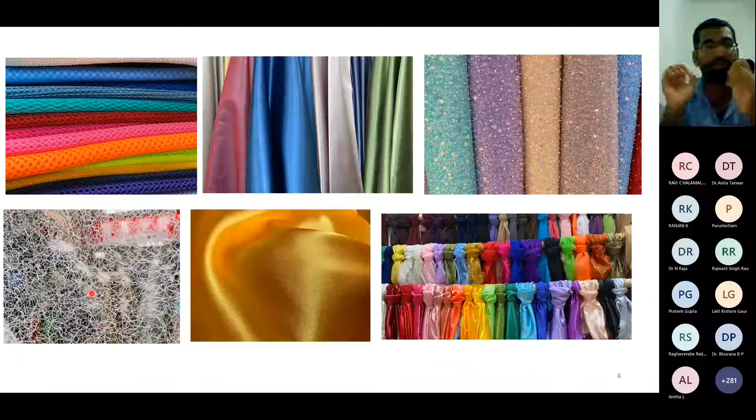And in recent years, we also faced many pandemic situations. So we also focus on something like non-woven structures like this. Here you can see these are all called non-woven structures. It's not a woven structure. It is irregular, non-woven, so that it can filter small particles. So that is a different field. They work on something that will be helpful for your mask application, something like this.

So now I want to focus on Internet of Things, right? So first of all, what is the basic component to integrate into your device? If you want to fabricate a device, that device should be able to sense your body motions, or it should sense what you are interested in. For example, if you want to sense your body temperature, or if you want to monitor your environmental toxicity, like metal ions or any other toxicants or biomolecules.

For example, if you want to monitor your glucose level, how will you monitor it? So these are all the factors we are looking at. So for the sensing, you should have some analyte like this. If you have your target analyte, your analyte should be very specific to your device. If you want to measure the glucose level, it should only measure the glucose level. Other factors like your temperature or humidity should not interfere; if they interfere, then it's of no use.

So you should create some selective sensors so that they work well. Or the sensors can be multifunctional, but they should not interfere with each other. So that is more important. And in the current situation, we are working on many Internet of Things, right? So why do we want Internet of Things? All the presenters before introduced everything in detail, so I don't want to go into more detail. I can just show the important things happening with the Internet of Things.

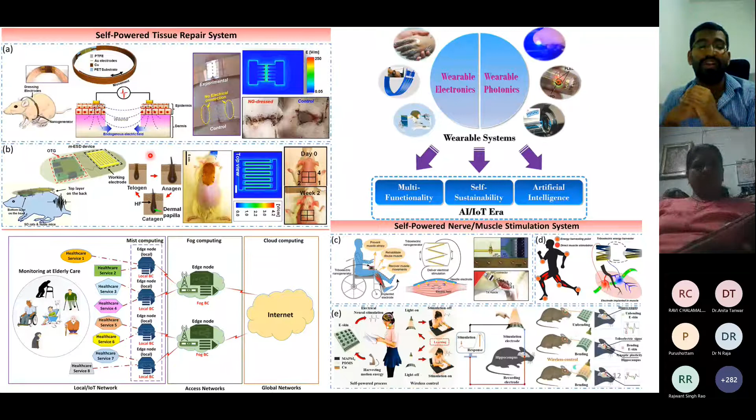And if you have some elder people in your home, you want to monitor them. If you want to monitor the health from remote locations, then you can easily monitor using IoTs. So another factor is you can also create some self-powered nerve stimulation system. Here you can see they are using some kind of self-powered, because in this case you don't want to provide the energy, because that is one of the drawback.

If you are running out of energy, then you cannot monitor yourself. So if you have this kind of self-powered system, you don't want to rely on any power source like capacitor or battery system. So this is more important. So this is quite interesting. So we are also doing this kind of self-powered devices.

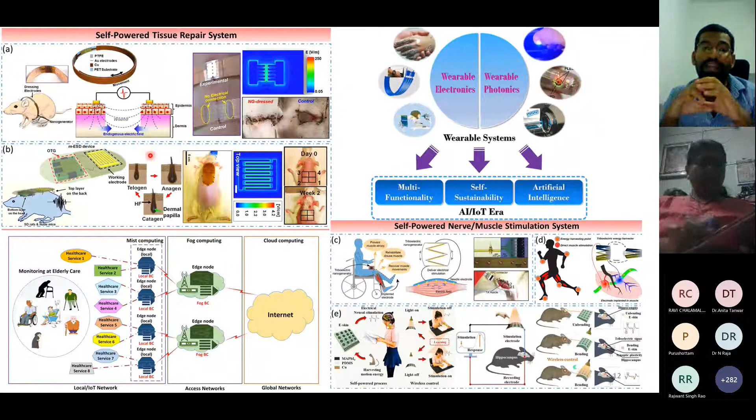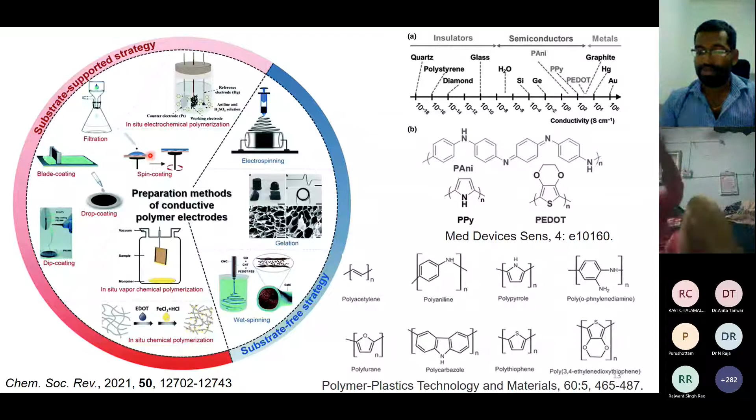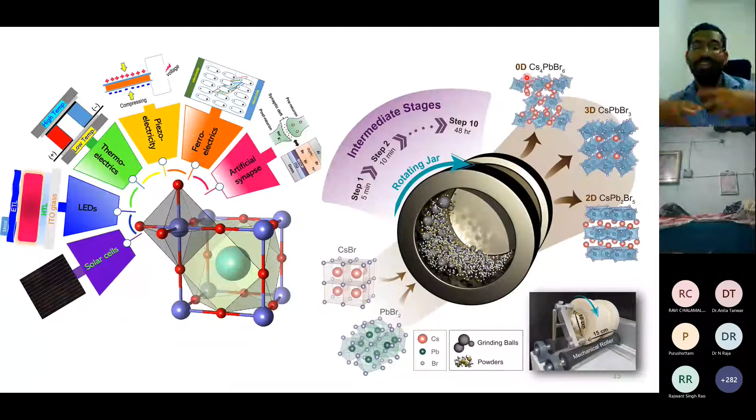So depending on the structure, work function, this kind of details, if you tune, then you can apply it in specific applications for solar cell, LEDs, thermoelectric, piezoelectric, artificial synapse. There are many different applications. So perovskites are quite interesting material. It has different properties.

Okay. Yeah, I'm able to.

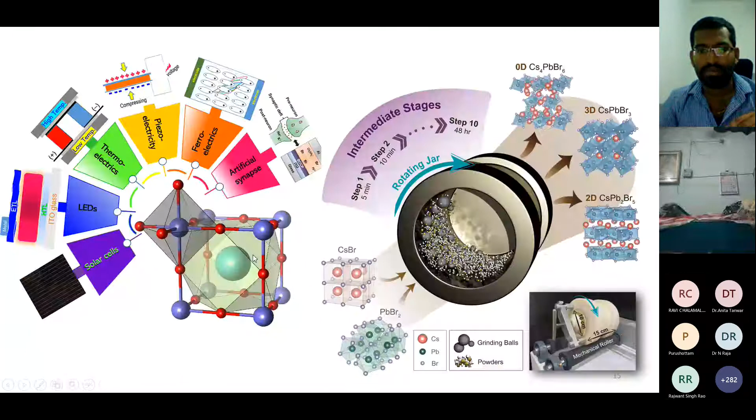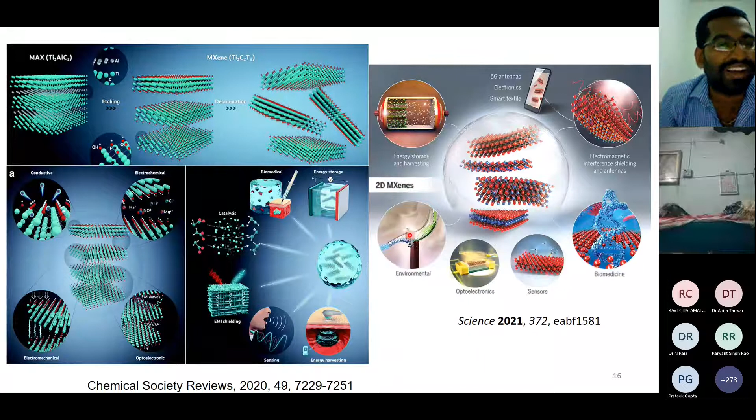I'd like to change my slide, but it's not moving. Sorry.

Okay. Now I want to stress why we want wearable sensors and self-powered sensors, because in the past we always relied on energy sources that are non-renewable. So we need renewable energy, especially wearable self-powered devices, which reduce your energy consumption in day-to-day life. That can contribute to good outcomes.

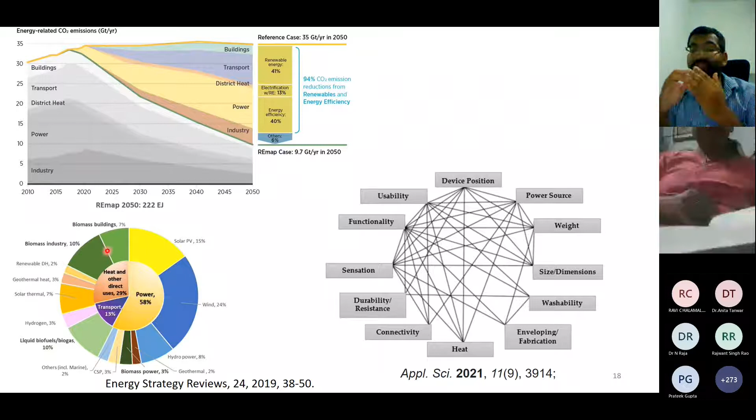And why we want wearable self-powered devices, and what factors are very important for your wearable sensors? For example, it should be lightweight, size should be smaller, it should be washable, heat resistive, connectivity should be good, it should be durable, and sensation, functionality, multifunctionality. These are all very important for wearable sensors.

And the energy crisis is getting higher day by day. And in wearable electronics, the market trend is getting higher, because everyone wants IoT based systems, because they can easily track their records, it's very transparent, and you can keep track of all your details easily in one touch, right?

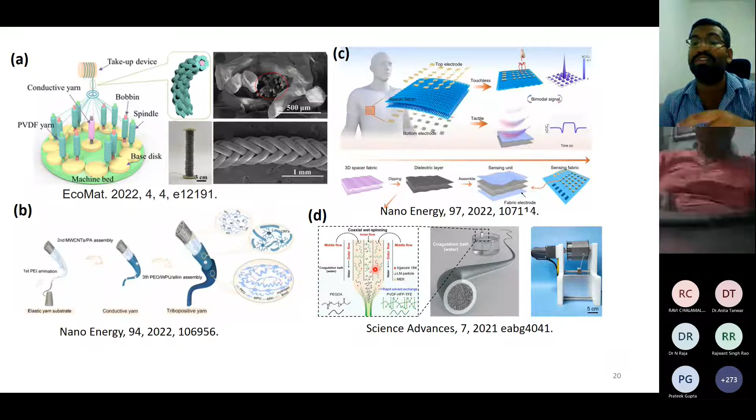And this is another method. They use elastic yarn, commercial yarn, and this is the wet spinning method, where they use polymer and functional or conductive materials inside to fabricate conductive electrodes. If you want to monitor your body strain, you have to prepare stretchable conductive electrodes like this. If you work out, your muscle is going to stretch.

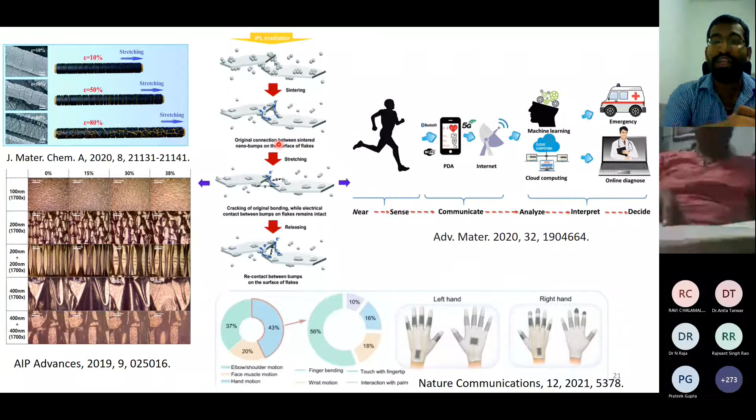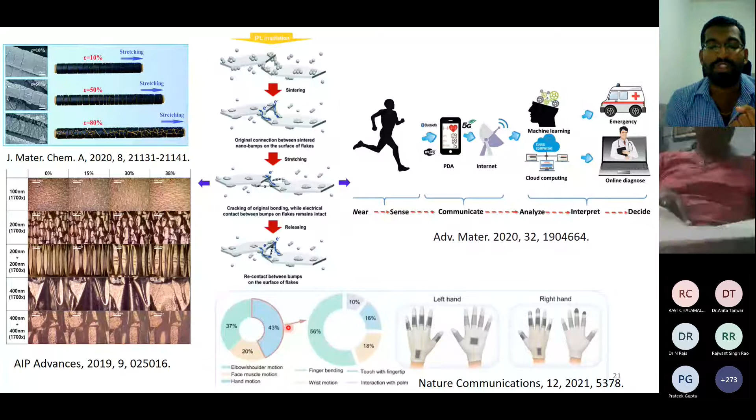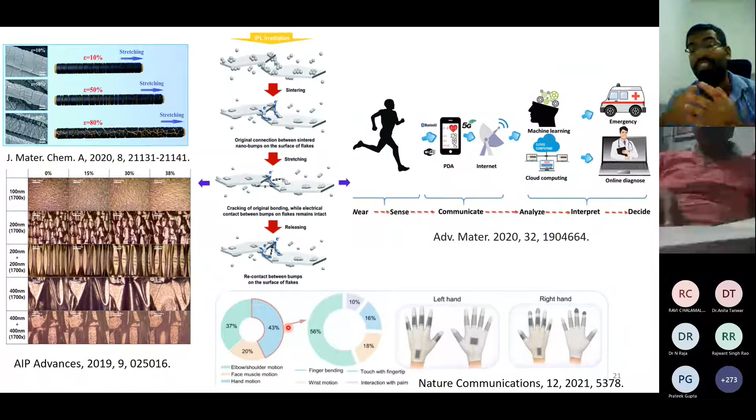So upon straining, if you work with this kind of material on your body and apply some stress, the resistance will vary depending on the different kinds of stress. In this article, they show how much percentage strain is created when using different body motions, for example elbow motions, finger motions, face muscle motions, hand motions, wrist motions, and what percentage of strain each achieves. They give some approximate values.

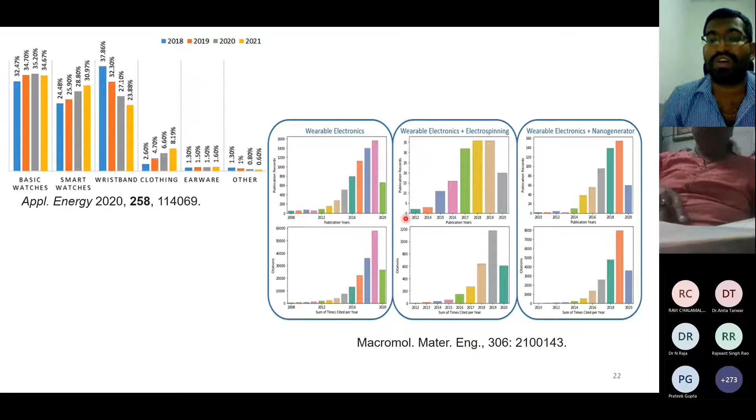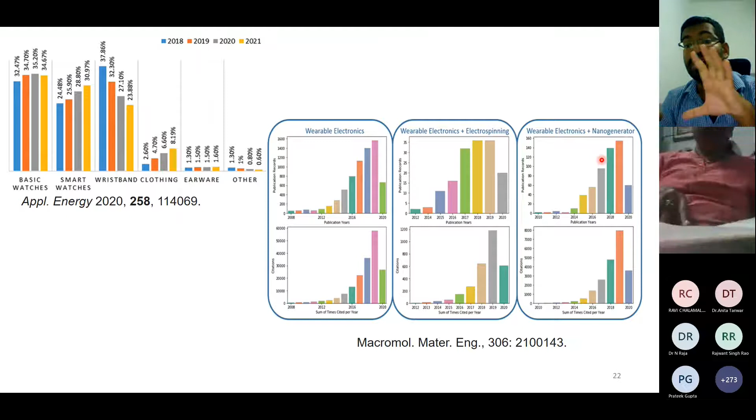The recent trend shows basic watches and smart watches, wristbands, and smart clothing growth getting very high in recent years. This highlights wearable electronics growth, with recent publications in the last few years growing a lot, and also nanogenerators to get energy with wearable electronics. So this is quite a hot topic to discuss.

We apply this kind of emissive material into light systems to prepare an optoelectronic system which is quite robust and can be reused.

Because if you're not going to heal your material - for example, if you're using your mouse and it has some problem, you cannot recycle it, the recycling rate is very low. So if you have a problem and want to repair it, or it can repair by itself, that's quite good. So self-healing is like that - it can heal by itself, so you don't lose its functionality.

For example, if your phone's screen gets torn, broken, or cracked, it can reheal by itself. So it's good, you don't need to replace them. The electronic components can be healed by themselves, which is good, and economically favorable. It's interesting, so in the future we can see a lot of self-healable materials.

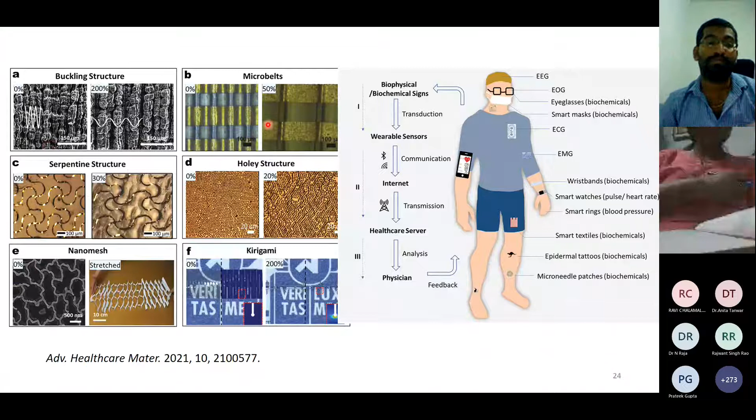Now I'm going to introduce different structures, for example buckling structure, microbelts, serpentine, holey structure, nanomesh structures, kirigami patterning. We used to play when we were kids to make stretchable components by cutting, right? That's very simple to make.

Here you can see how it works. This is a simple way to make stretchable electronics like this.

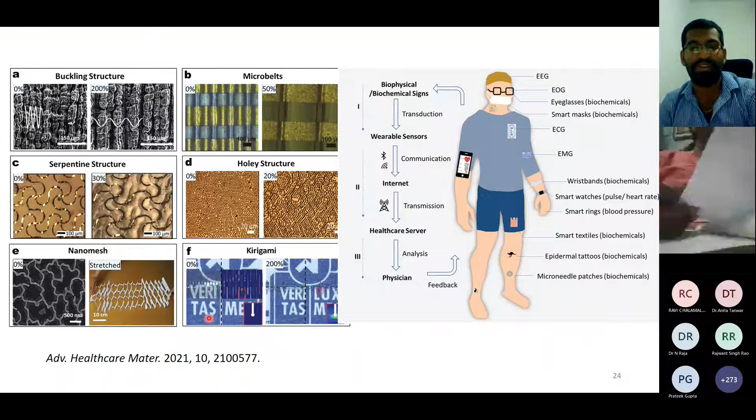Here I want to introduce this because I work on fiber-based light emitting systems as well as some sensors. I want to introduce different methodologies to prepare 1D fibrous material, starting from melt blowing, centrifugal or force spinning, blow spinning, laser assisted melt blowing, and microfluidic electrospinning.

So this is melt blowing. Here we put the polymer and melt it up to its melting temperature, then we extrude it, and then collect it as a fiber like this.

And this one is centrifugal or force spinning - it's similar to our cotton candy maker. Here we put our polymer in the middle, pass some air, and rotate it, because centrifugal means it gives some centrifugal force to your material.

Using this kind of force, we can get some nano or micro form of fibers. You can collect them, and then form some devices based on that.

The other one is blow spinning. With the help of compressed air, we can pass the polymeric solution and spray it using some voltage, and then we can form the nanofiber structure.

The other one is laser assisted melt blowing. We use the laser to heat the membrane and then the polymer, and we can form this kind of non-woven structures.

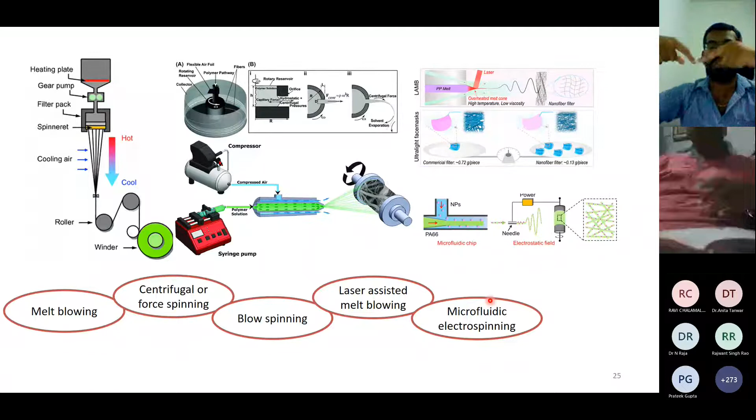The other one is microfluidic chips. We can form core shell structures, one side and the other side. Two materials can be mixed and extruded this way with the help of voltage, then the collector can collect all the fibers, so it's easy to make them this way.

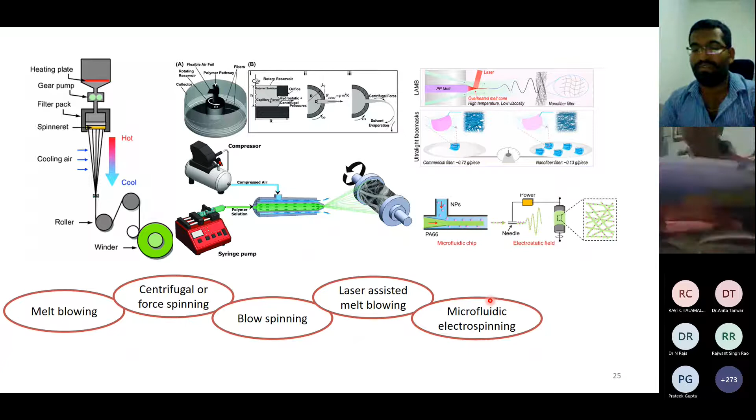I want to introduce different kinds of fibers, because what I said in the past was just uniaxial or core shell. Here there are different forms: coated structure, composite structure, neat structure, biscrolled structure.

Here you can see how they do biscrolling - it's like drop casting your film and then scrolling it, and you end up with this kind of structure. And then there are wet spinning structures.

Here you can see they use some rotating coagulation bath. If you are going to prepare fibers, you put your polymer plus some functional material like MXene, then extrude them into a water bath or coagulation bath. Then you collect them with the help of a spool, so it's very easy to fabricate.

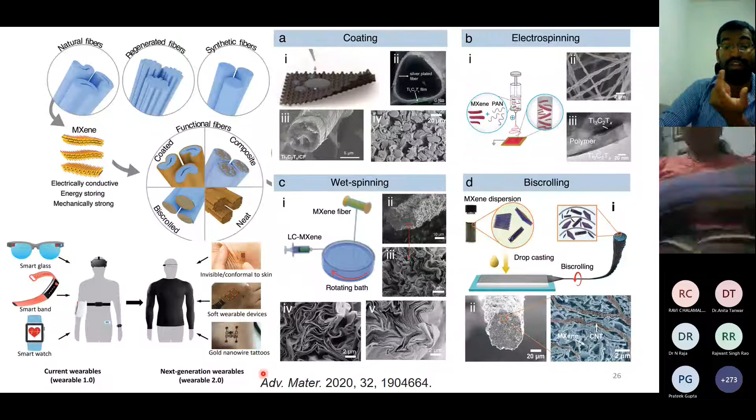There are many different wearables in the current scenario. In version 1.0 we are able to see smart glass, smart band, smart watch, and in the future you can see invisible conformal to skin devices, soft wearable devices, and tattoo based devices. So we'll expect more.

Here you can see the basic structure of how electrospinning works, since I work on fiber structures and now primarily focus on this method. This is the very basic setup - we use a pump to pump the polymeric solution, fill it in here, and using the pump and high voltage, we can collect the fibers with the help of collectors.

If you want to tune your fiber morphology, you can also tune it by using different solvents or parameters like flow rate or voltage. All these kinds of things can be done.

If you tune your needle system from uniaxial - this is like one needle - versus a double needle core shell structure, here you can visualize it. The core solution comes from here, and the sheath solution comes from here, so you end up with core shell structures.

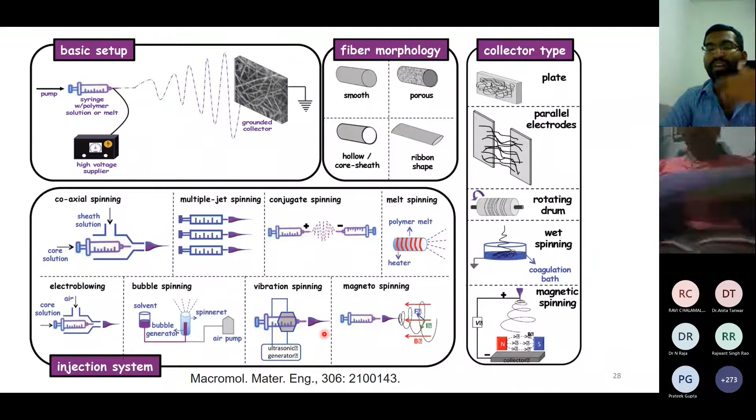There are different methods - if you tune all this, you can end up with different interesting morphologies. In this article, they mention all the different ways to collect fibers and what type of fiber system they can form using different setups, changing components to end up with different structures.

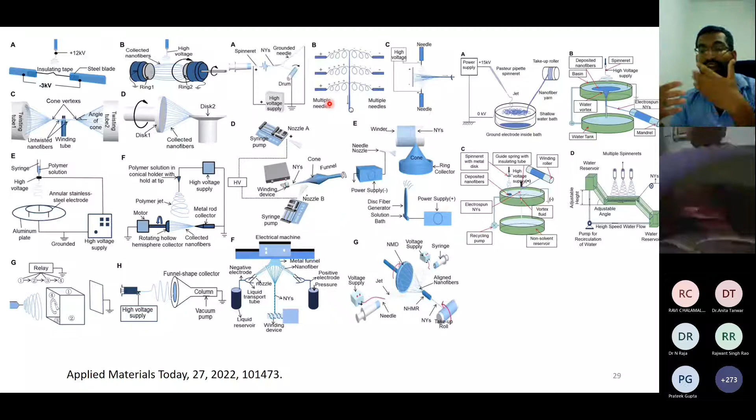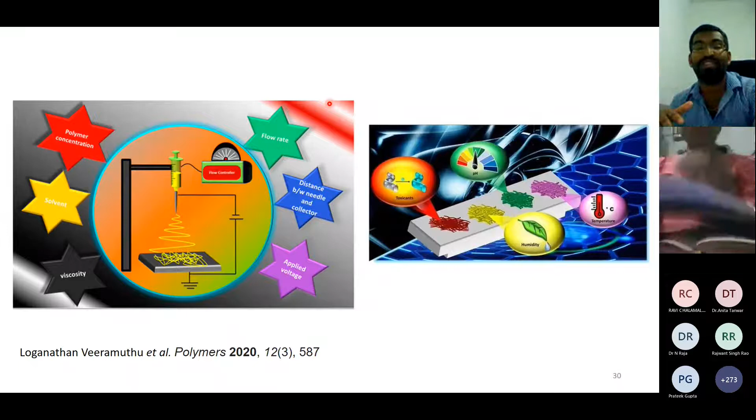This is another article we published recently, about polymeric systems - conjugated copolymer system based electrospun nanofibers - used in different fields like sensing and other parameters. This is open access, anyone can access and read it at any time, so you can have a look.

This is another paper we published, for sensing pH, temperature, and metal ions, these kinds of things. We also discuss electrospinning in this review article.

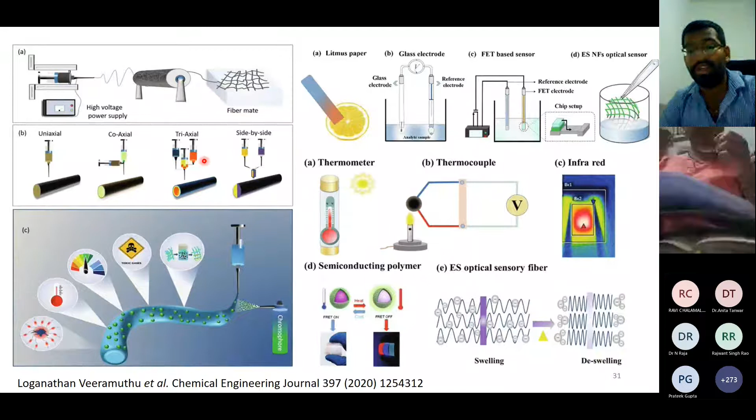Electrospinning has a lot of advantages and very good applications in different fields, starting from smart textiles, smart garments, optoelectronics, energy harvesting, batteries, food packaging, anti-fouling, biomedicals, and sensors. There are many varieties.

I want to stress there are many different sensors, not only one type. I can introduce a few types, if time permits: piezoresistive and capacitive, optical, piezoelectric, triboelectric, and magnetoelastic.

Let's go into piezoresistive, because it's very simple and anyone can understand. For example, as I already introduced, if you apply some stress on your elastic conductive material and strain it, then what will happen?

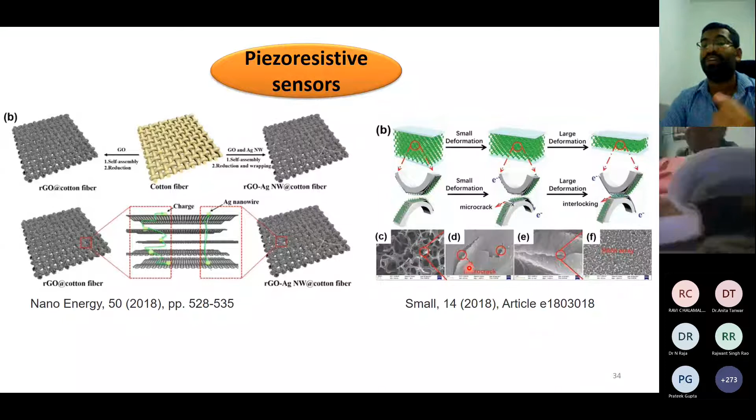So here, you can imagine this is your human skin, having many blood vessels. So if you want to monitor your pulse rate, and apply some pressure, you can see how it works.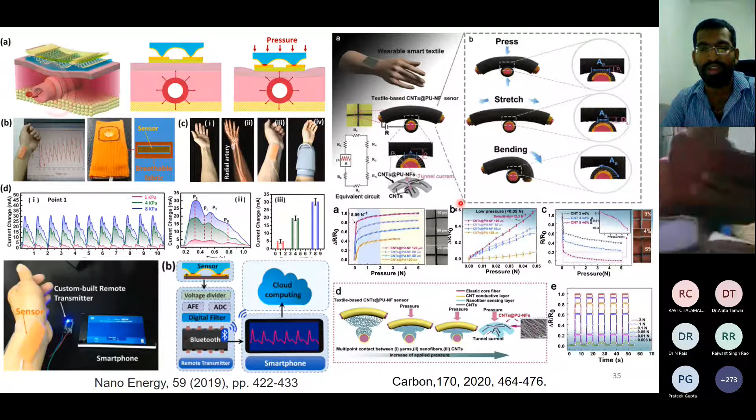The same way here, they are using wearable smart textiles, with press, stretch, and bending. They are measuring delta R over R naught, the resistance upon different newtons, 0 to 5. Here you can see how it works, the resistance value upon different newtons, ranging from 0.003 newtons to 3 newtons. It's a very easy working principle, so anyone can easily understand.

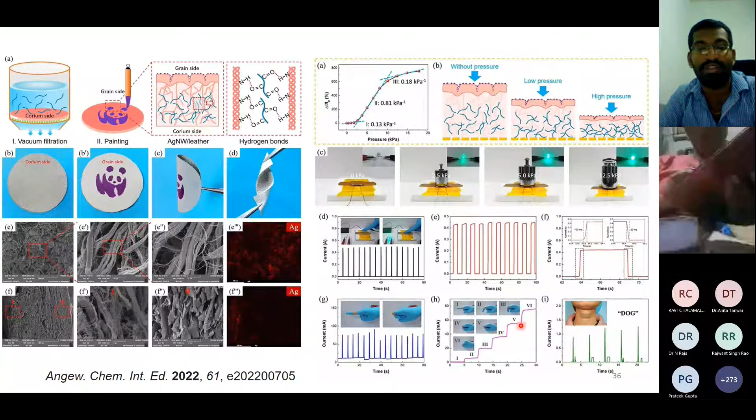The electron is going to be transferred from top to bottom. So that kind of stress or pressure can be easily monitored using this kind of structures.

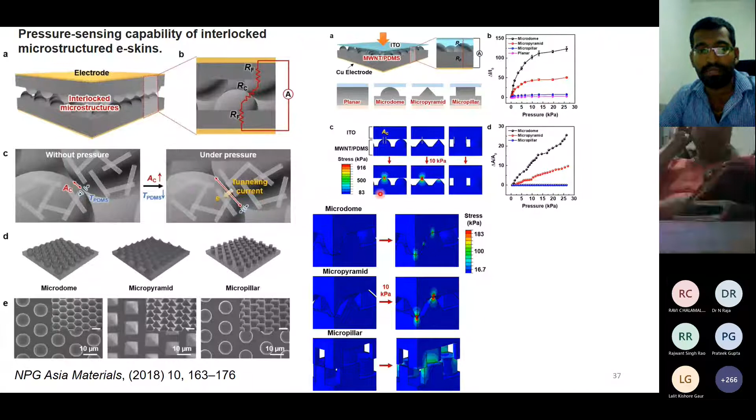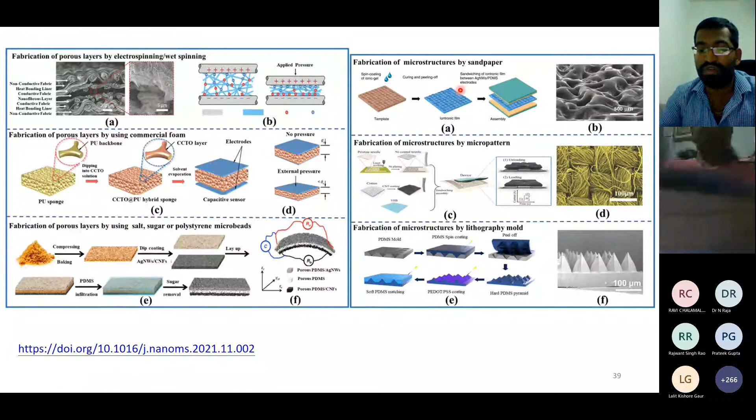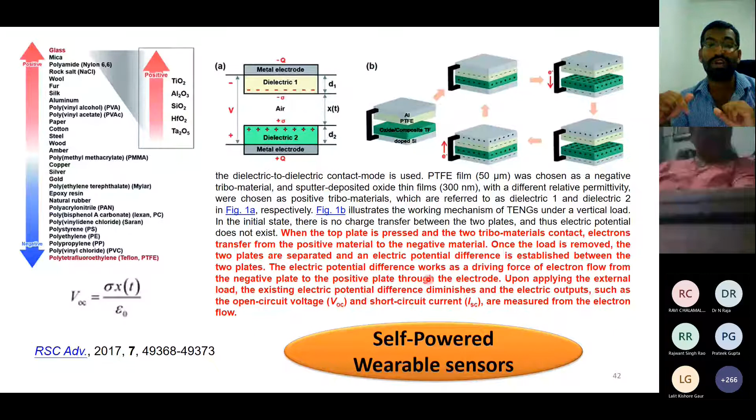This is how your self-powered wearable sensors work. So self-powered triboelectric wearable sensors work on this principle. You need two dielectric materials and electrodes to form this kind of wearable sensors, self-powered wearable sensors.

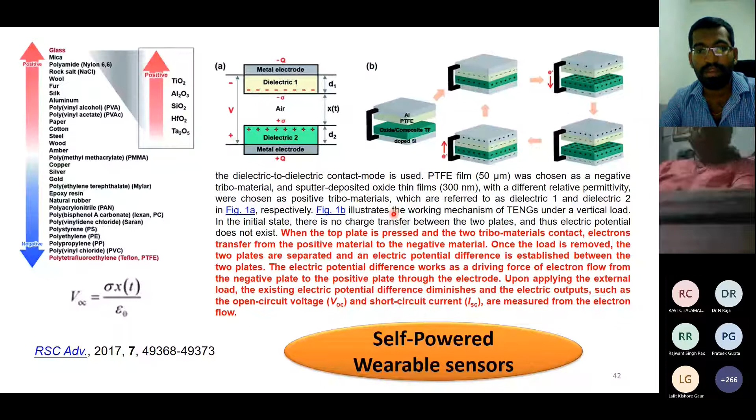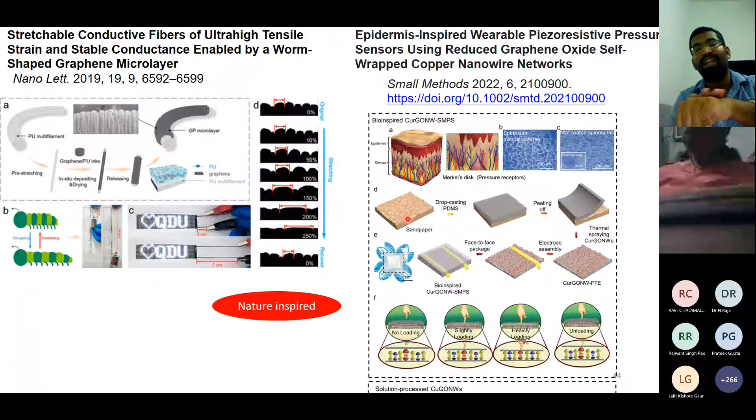And the other one is epidermis inspired. You can see, because our skin has dermis and epidermis layer.

Epidermis is the topmost layer and dermis layer is the bottom. So how can we mimic this kind of structure? By using some sandpaper and then dropping some elastomers like PDMS and then peeling, you'll end up with this kind of rough structure, and then do some electrode assembly. Upon pressure, this kind of rough structure is going to give better sensitivity. That is the idea. So they published this kind of work.

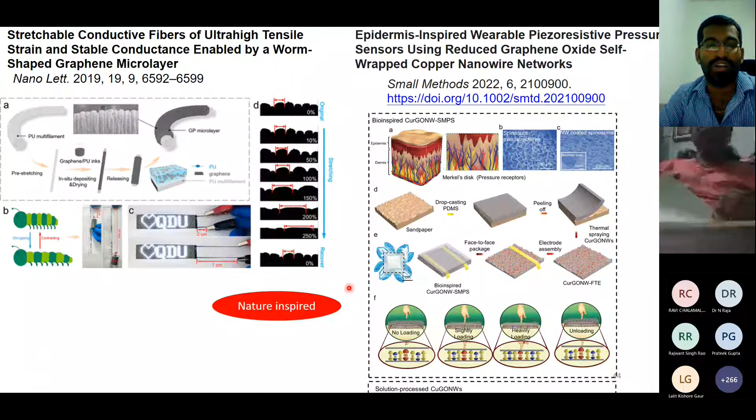So nature-inspired micro nanostructures are quite interesting. And why do we want these nature-inspired micro nanostructures? Because they give exciting features like this, which is very important for the wearable aspects. If you're going to use it on your body, it should be easily adherable and very conformable, so it won't easily come off your body. You need a very good attachment with your body. That is more important, and it should be tactile, and it should have a very good interface. These are all the things we should take care of.

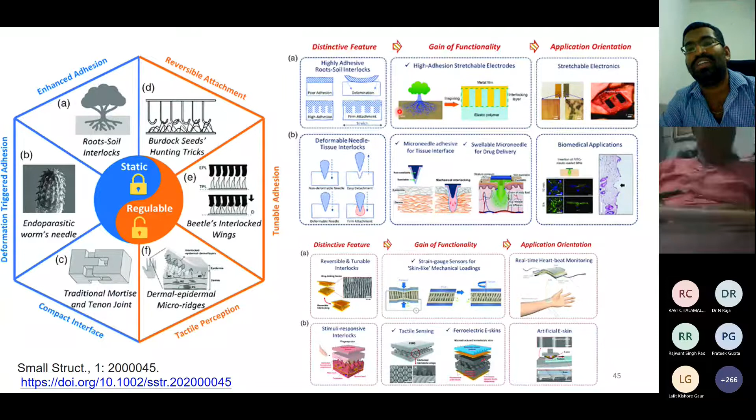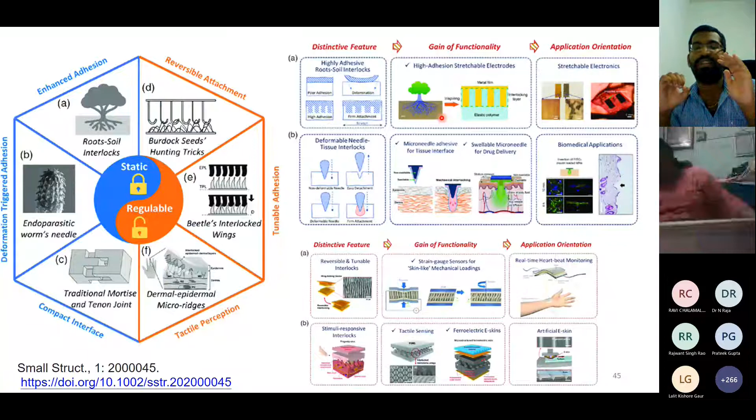So how can we do those things? By tuning our micro nanostructures. Here you can see they are mimicking a root-inspired structure, because here we are going to form some elastic polymer plus some metal film. How they can form this kind of metal film, how to enhance their durability by forming some interpenetrating root-inspired structures like that. And for biomedical applications, for stretchable electronics, so many things rely only on structural engineering. So structural engineering is more important for real-time applications.

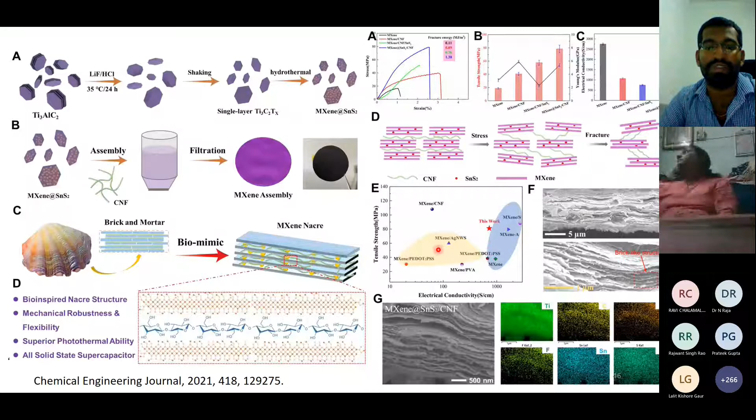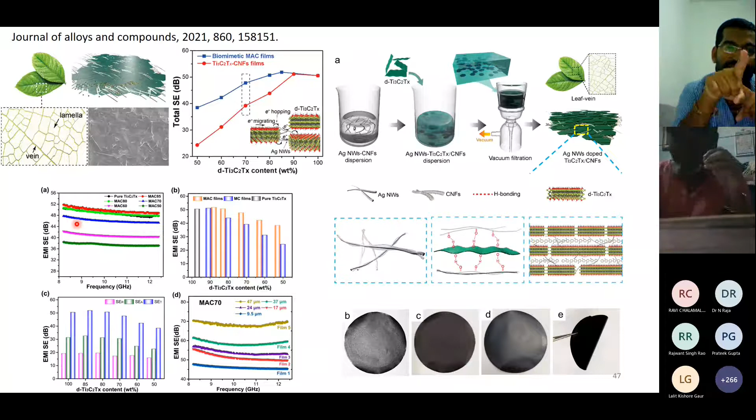The other one, here you can see leaf-inspired structures. They are able to form this because a leaf has many substructures. If you look under the sunlight, you are able to see these structures: one has a vein and the lamellar structure. Here we can compare them with our functional materials, because as I already said, this is MXene, and MXene is like a sheet, so it can be considered as the lamellar, and the other one, silver nanowire, is like a vein.

This kind of structure can improve your strength, and it also gives very good shielding effects, so it can be helpful for electromagnetic interference shielding. They also studied this by optimizing the MXene content. So understanding the structure, studying it, optimizing the structure and optimizing the fillers, these things are quite important for wearable sensors.

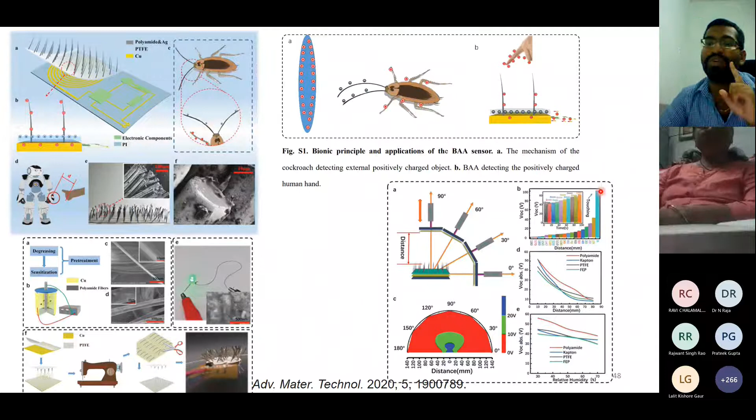So if your distance is too long, the voltage will be less. If you're getting very close and if you touch, the voltage will get high. And depending on the different distance and angle, you will end up with a different voltage response. So these kinds of self-powered devices are quite interesting.

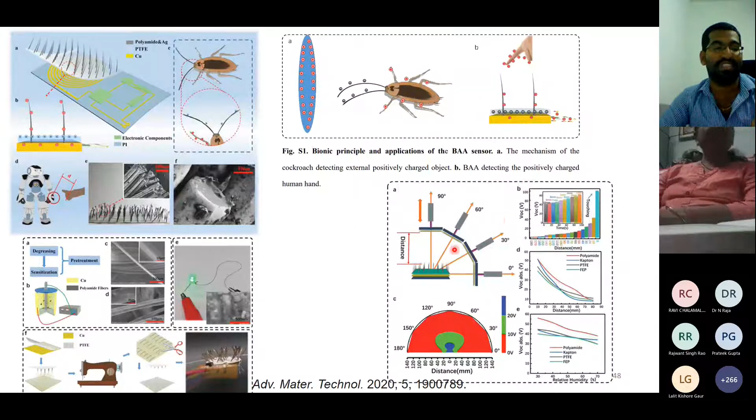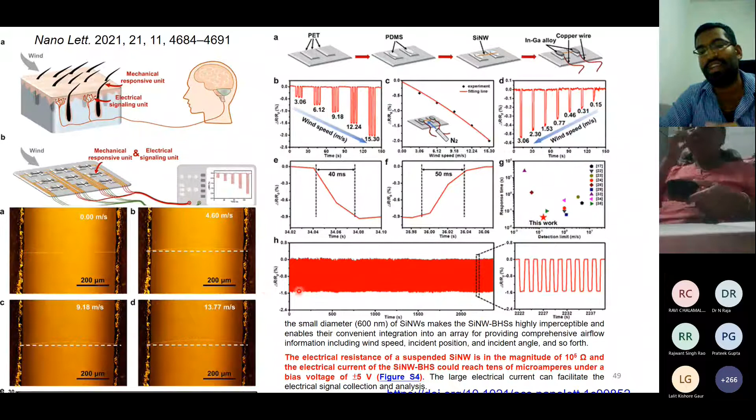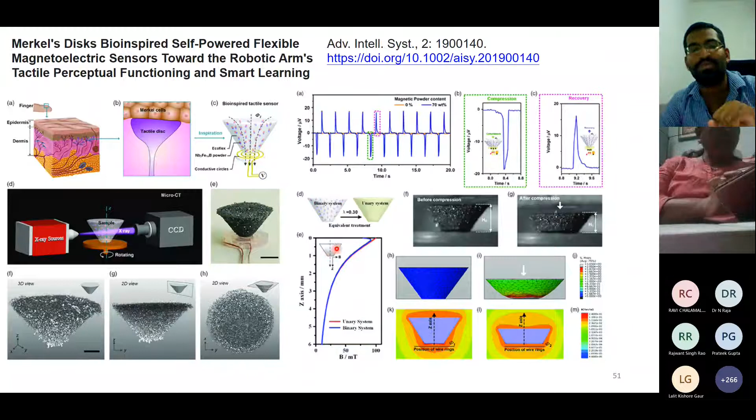And here, this is another example of bio-inspired self-powered flexible magnetoelectric sensors. Here you can see they are using a different structure, before and after compression, what happens. Here they are using magnetic pillars; they use a commercial elastomer called EcoFlex, then the magnetic filler is this one, and then they use the circuit here. Then when we apply some stress on it, what will happen? You can see the differences. They are using simulation software to study the stress.

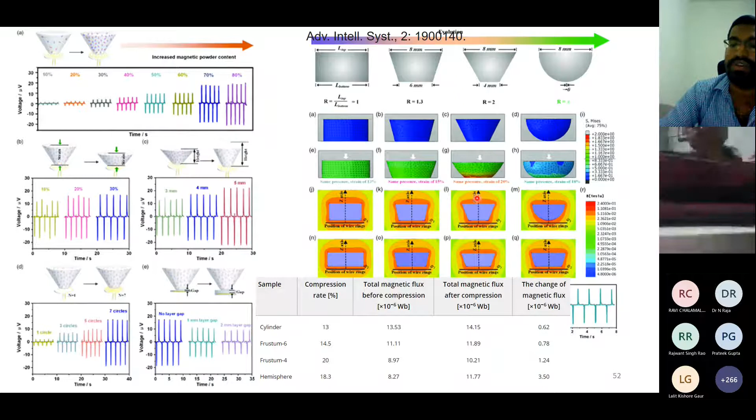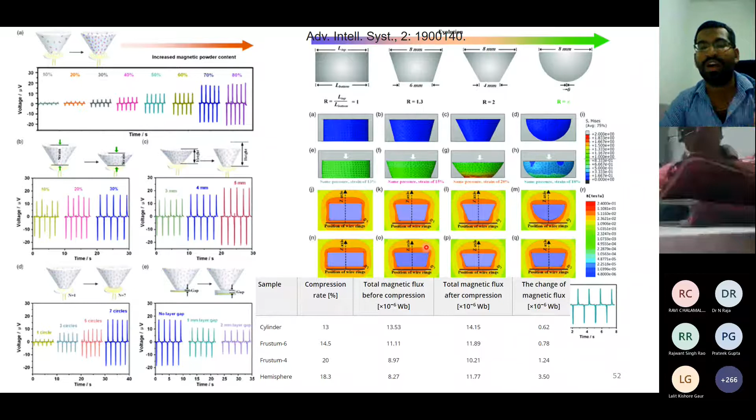So here you can see upon increasing the magnetic powder content, your voltage generation is getting high. And if you can tune this kind of structure, here you can see this is flat, both sides on top and bottom are the same. But if you tune this to 6, 4 and 0 like a hemisphere, then your performance is going to get enhanced. So the change in magnetic flux is important. If you can optimize your structure like this, the change in magnetic flux can be achieved very well in the case of the hemisphere. So by fine tuning your microstructures, we are able to get very good results in terms of electricity generation.

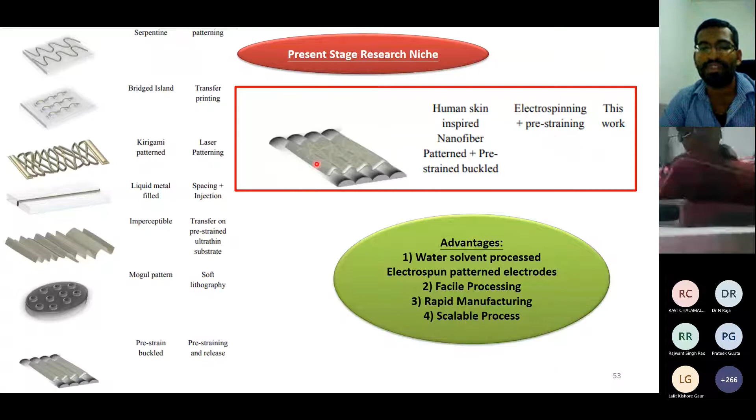And now I want to introduce this kind of patterned structure. Here I'm going to introduce the electrospinning plus pre-straining strategy to form this kind of wrinkled structure, plus having some nano ridges like this. So how do we make this kind of structure? First, we start with our electrospinning method to form 1D structures like this, and then we use some PDMS elastomer, and then we anneal to cure the elastomer. Then you can peel them, and you can see here there are many fibers embedded into your elastomer like this.

And then, because we know that here we use some water-soluble polymer, if you wash, we can easily etch them. So you'll end up with some nano ridges. You'll be having many valleys like this. And then we use some pre-straining methods, and then we use a conventional method to prepare some silver conducting layers over our material like this. So finally we'll get micro and nano structures like this in one substrate.

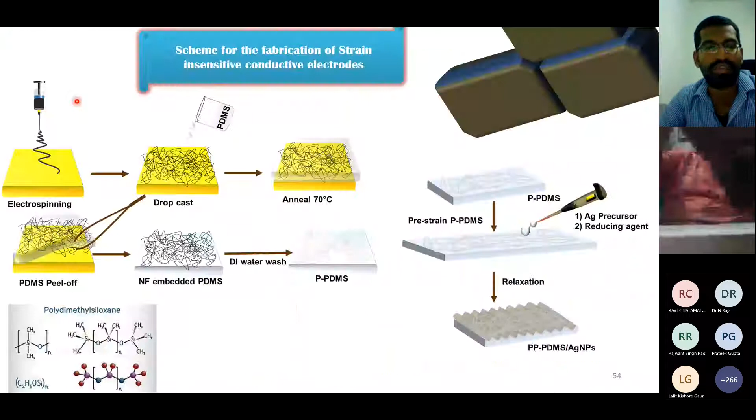And then we study the surface energy, because surface energy is quite important for good conductive substrate formation. Using the flat substrate, we are not able to get a very good surface energy. But if we tune these structures, we are able to get double the surface energy. So we can end up with very good crystalline PPPDMS silver nanowires, silver nanoparticles.

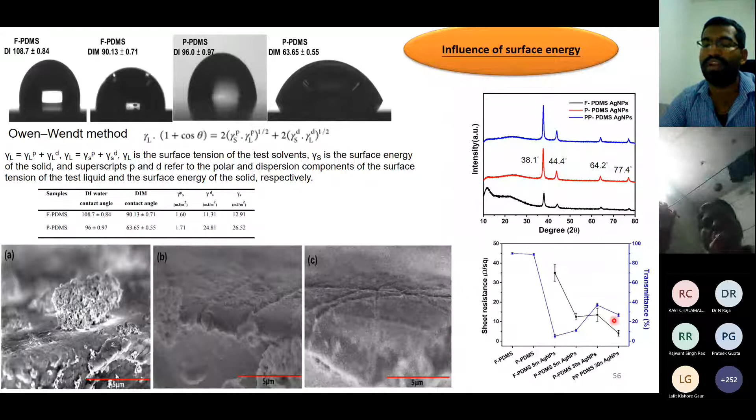And here we check the transparency versus sheet resistance for the different substrates. Here we are comparing flat. FPDMS is nothing but flat, and pattern PDMS with different timings to form the silver nanoparticles on it, like 5 and 30 seconds. Using patterned PDMS, like micro nanostructured PP, that is nothing but your PPPDMS, within 30 seconds we are able to get a very good conductive substrate. Here you can see the differences between the two structures.

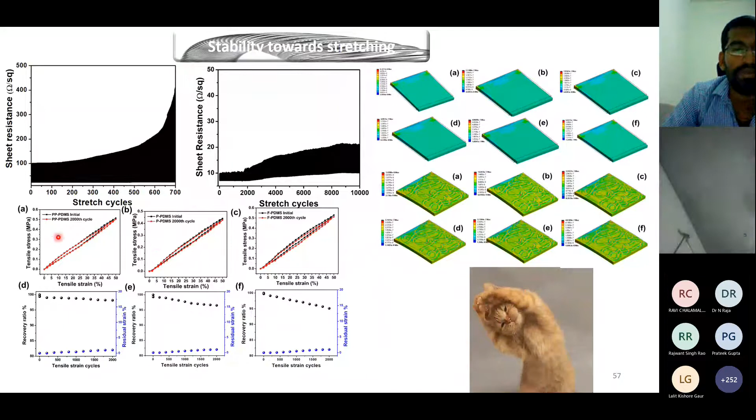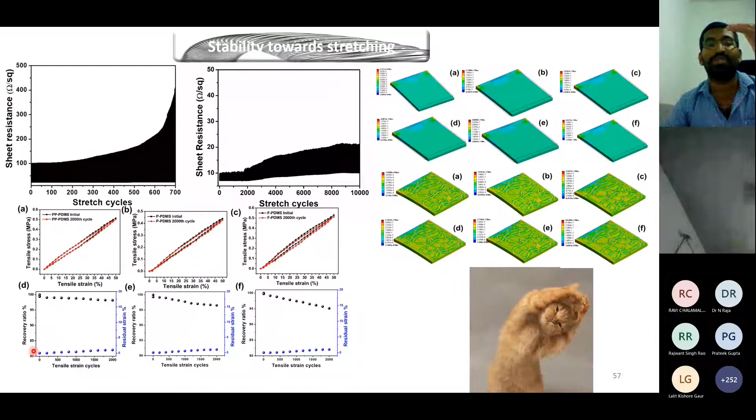In the conventional state, you can see the stress is concentrated more, whereas with micro nanostructures, we are able to dissipate the energy. So we are able to make the stress distributed over the surface. That is important to get very durable wearable devices. Here I'd like to share the differences between PPPDMS and FPDMS. We can certainly see the differences in the recovery ratio and the residual strain. If the recovery ratio is high, it means your device can work longer. So that is quite good.

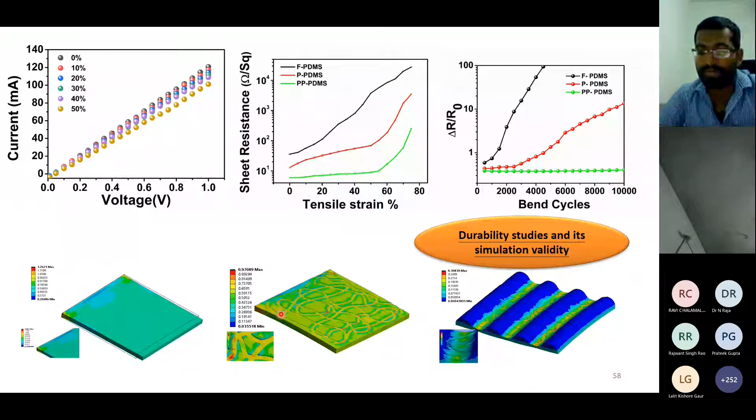And the other one, I want to share the current durability. Here you can see current versus different strain percentages. We do it for 0, 10, 20, like this. We keep straining the conductive electrodes like this, and then we monitor the IV curve. And then we also check the sheet resistance over different tensile strain and bending cycles. It's quite good. And here we can see the strain studies for 5, 10, 15, 20, up to 2000 cycles. And then residual strain and recovery studies.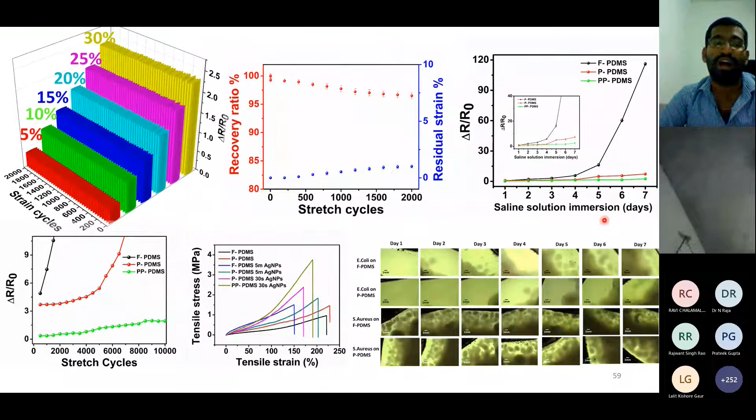And then we also check the antibacterial test for common bacteria like E. coli and Staphylococcus aureus. We also check the saline solution immersion stability, because the working environment can be anything, not only water. So we also want to check saline solution.

Apart from that, we also do some strain-insensitive pressure sensing, because we are going to use it on our body, so it will have some interference. For example, as I already said, if you're going to strain or do some workout, at that time your conductivity will change automatically, right?

So how to avoid that kind of interference when you're going to monitor your pressure by using this kind of PPPDMS structures? So yeah, we do those studies, and we also checked up to 30% the sensitivity retained, which is having very good performance under wearable conditions.

And the other one, just to mention, is another triboelectric series I already introduced, and here I already said the farther apart they are, the better energy generation we'll have. So you can go through these things. And this is a real-time example. You can see how they fabricate this kind of TENG structure using some natural-based materials. So we can also try this kind of structures. It is possible to do.

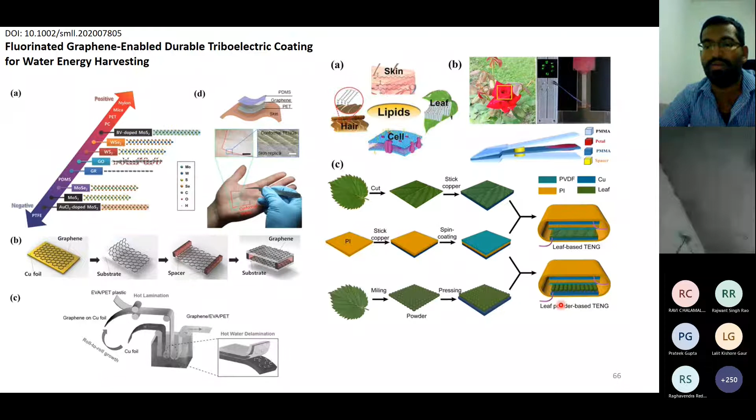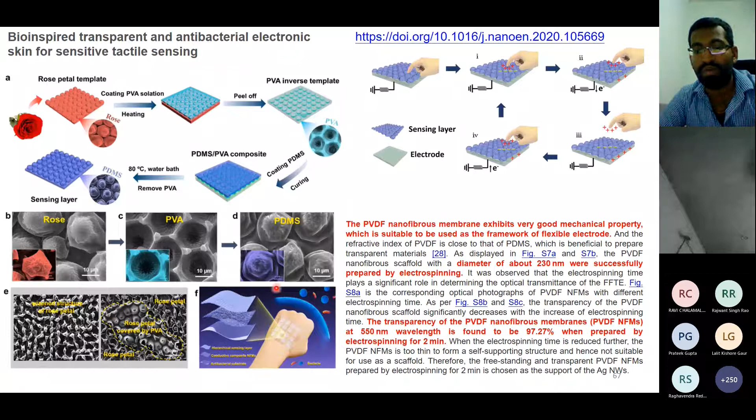Because we should know that the distance and the dielectric properties of the two dielectric materials are quite important, and the maintenance of our surface charge density using microstructures. For example, here you can see they are able to adapt rose petal structures. They use the rose petal templates, form this kind of structures, and then use it for triboelectricity generation. Then it is giving very good performance.

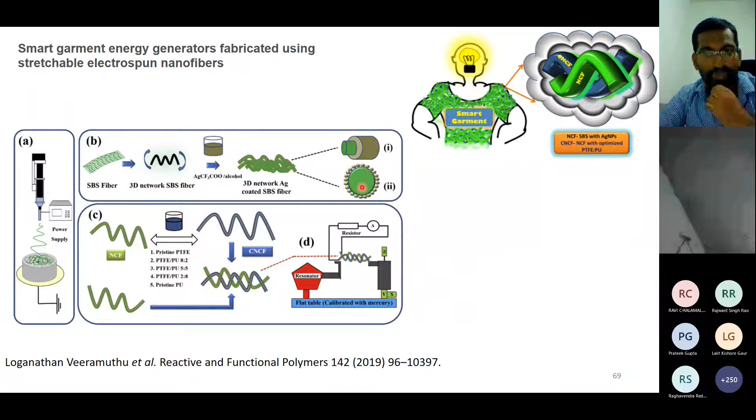So in the same way, we are able to do some wearable devices, smart garments. In this paper we discuss how we use some stretchable SBS polymers to make 3D structures of smart garments using some polymeric nanostructures. Here you can see we use two different materials, PTFE and PU, with different ratios, and we optimize the conditions to get energy generation. Upon straining your textiles, you can enhance your energy outputs, store them in the capacitor, and then utilize them later.

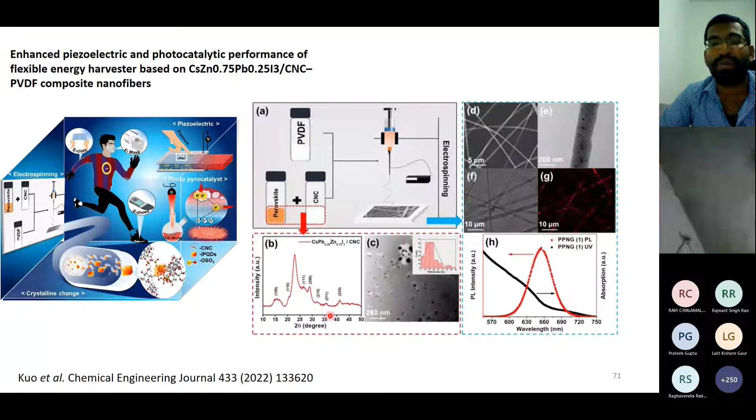The same way, we are also doing some piezoelectric generation, and here we are using perovskites with the conventional PVDF piezoelectric polymer, because we know that piezoelectric polymer has different phases, and it is quite important to have a beta phase, because it has very good ferroelectric property.

So if we can tune that phase by using some fillers, like here we are using some perovskite quantum dots. Here you can see this one is your quantum dot, and we have some CNC to give some stability, because in the beginning I said that perovskites have very limited stability. To improve the stability, we have to tune the structures and use some ligands to protect the QDs.

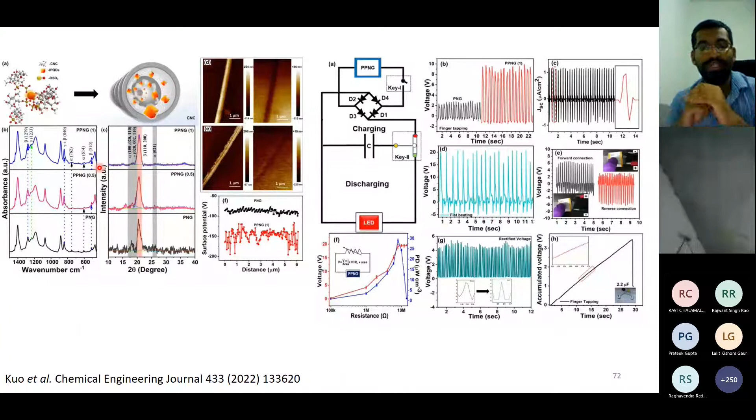So we do those things, and then we employ them in the nanofibers, and we check the, sorry, excuse me. So we use them, and then we harvest the energy using this kind of system. And we employ them to check different body motions. So you can look.

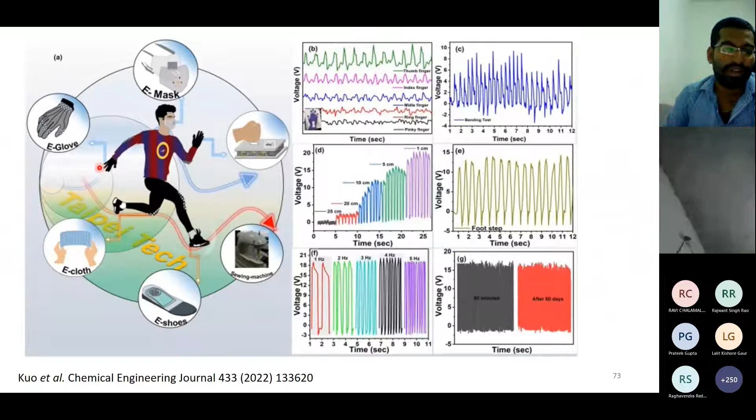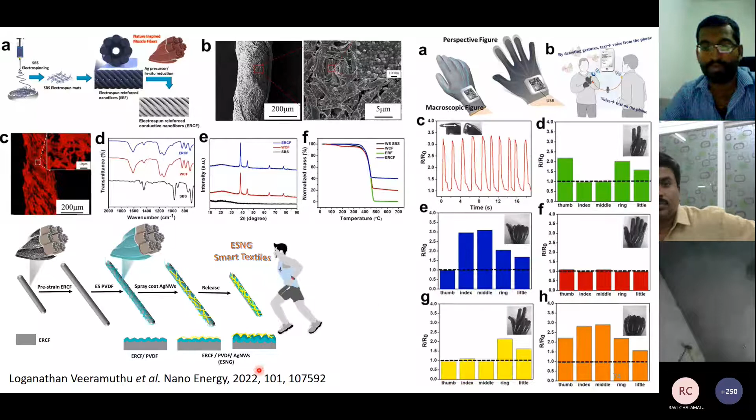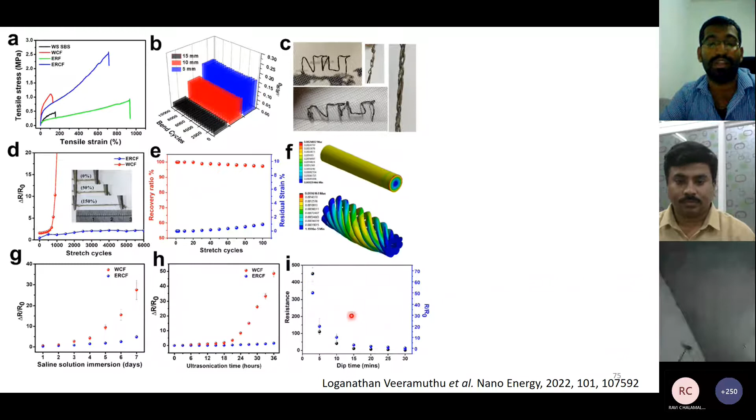So we are having very good results in terms of durability as well as chemical stability. Finally, we formed the device to compare the two different structures, one uniaxial, the other electrospun reinforced structures, to form piezoelectric nanogenerators, and then we checked the durability over time. We also tried the forward and reverse connection to check if the piezoelectric mechanism is valid or not.

So in comparison to the conventional WSNG structure, ESNG is giving much better results, nearly 4 times better. It also has very good durability in terms of air blowing, because the fiber structures are very finer. You might think it is very easy to wash off or something.

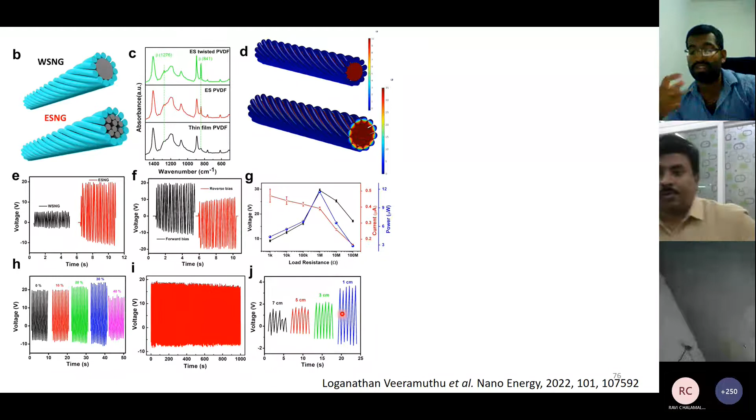But because of the nanofiber interaction between these things, which has very good surface area and very good adherability, we checked the air blow structures, which is available in the paper. If you have any doubts, you can go through this.

Finally, I want to say, because we use this kind of sensors, the major thing is we are able to monitor many things like sugar, temperature level, asthma, heart rate, motion, blood pressure, and other things we have to be careful about regarding our human body.

So how it works: the motion sensor, sensing is the primary thing. Then using this kind of IoT techniques or wearable body area networks, we are able to convert these electrical signals and transform them using the internet so we can get remote health services from medical practitioners.

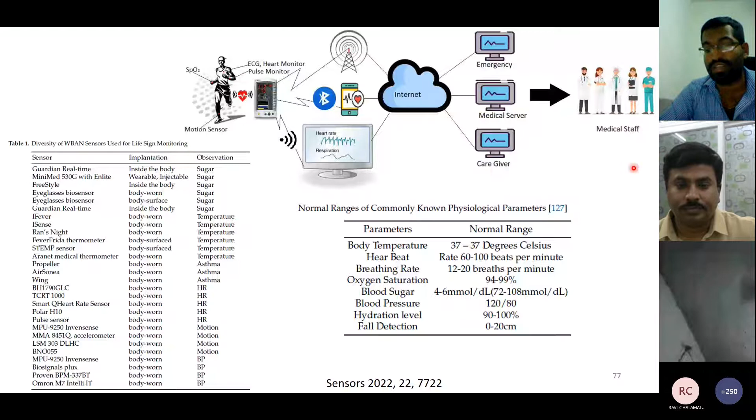This is good, but there are some safety issues, because our privacy and all our body health details can be tracked by someone. So it's quite important to have very good safety platforms.

We have to be very careful about our details, so the major thing is security. People are working on it, and I expect they'll come up with good results for this.